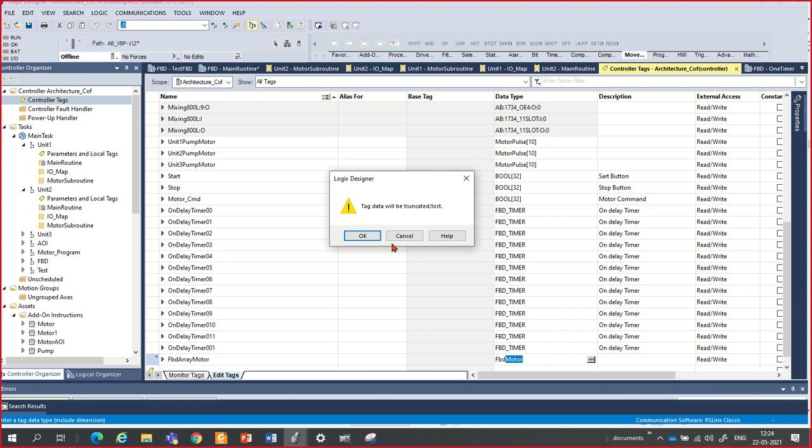Array motor. Okay, create FBD array motor tag, and here I will select FBD motor data type. Okay, and here we can try creating the array, suppose create a, okay,

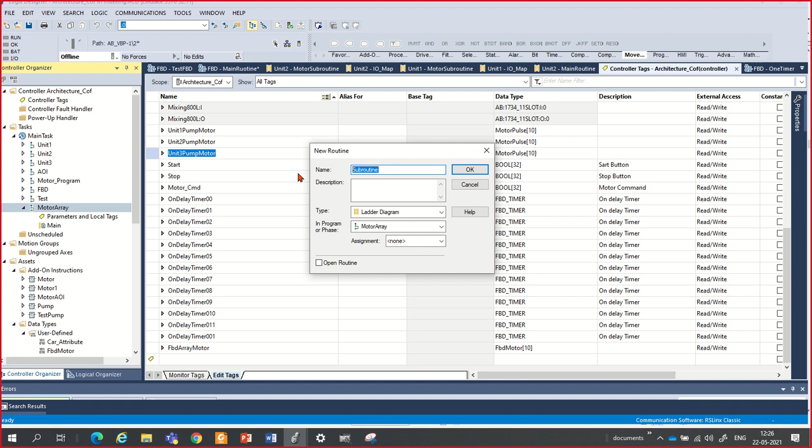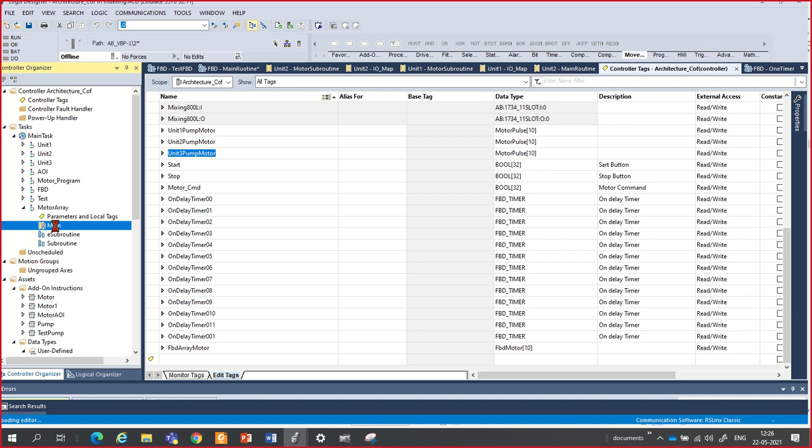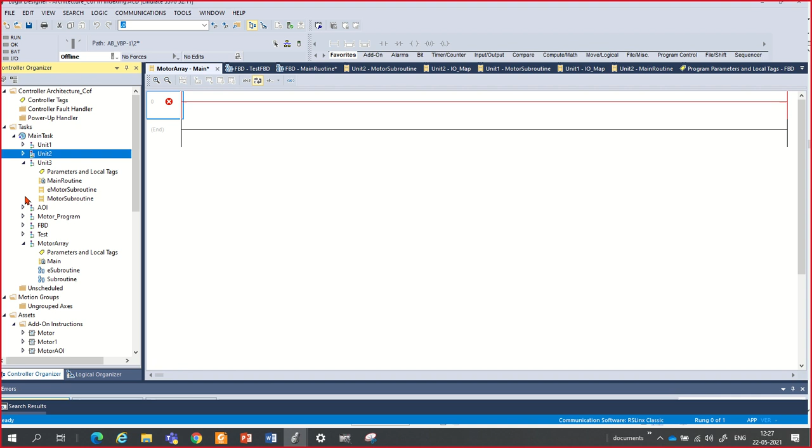Then add new routine, here we add e subroutine, like previously we done e subroutine, and create OK. There is one e subroutine and subroutine. We have two routines. From main routine, see here how we created, you can see here main routine. In the normal routine, you want to add this logic, like we can add it,

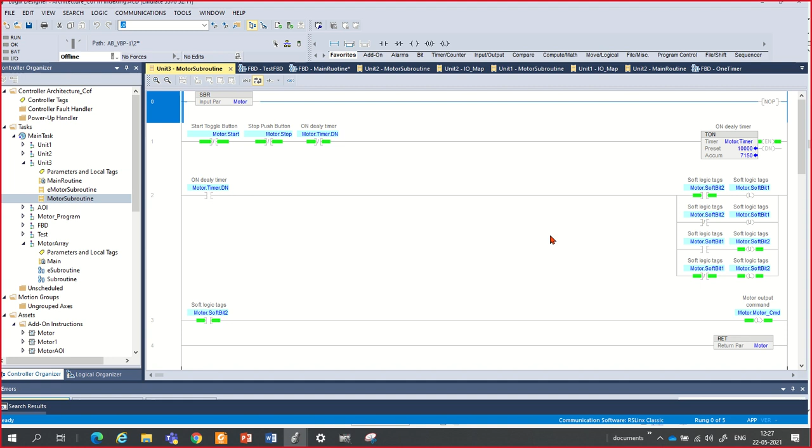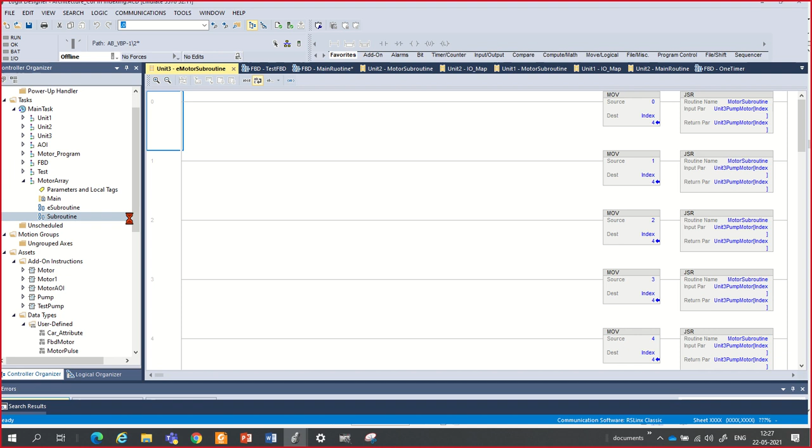and from the e-motor routine we can create this JSR instruction and pass on this JSR tags. Okay. In the subroutine, go to the subroutine, and here you need to create two different tags, which is, I think in the routine we required these tags also, which locally we have added is b0, and this tag also we required. I think we can try without this b0 tag, and like that tags we can use local tags, and then we can try to create.

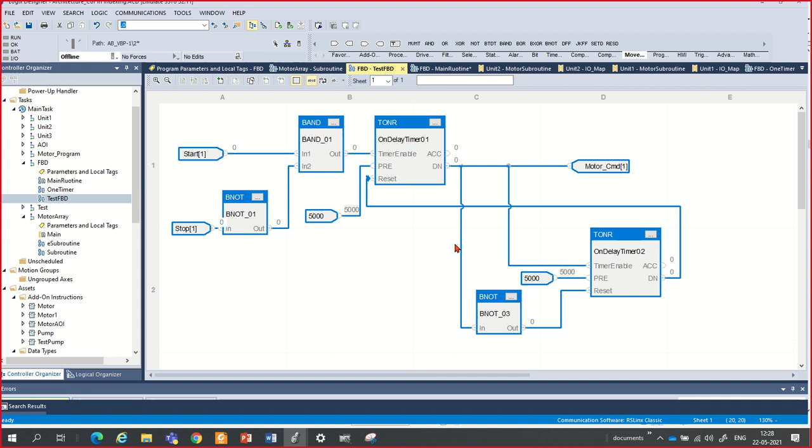I will just go to the test FBD and select it, copy it and put in your routine. Okay, then here we need to change the tag name. Here what name we want to give, the local tag here we need to create. Here I will just create the motor tag. I have created, which is motor. Then here the data type of this motor is also FBD motor, should be FBD motor.

Okay, then you can assign this start. In the start you can type motor dot start. Okay, we'll just try it directly, motor dot start, and same here. Here you can select motor stop.

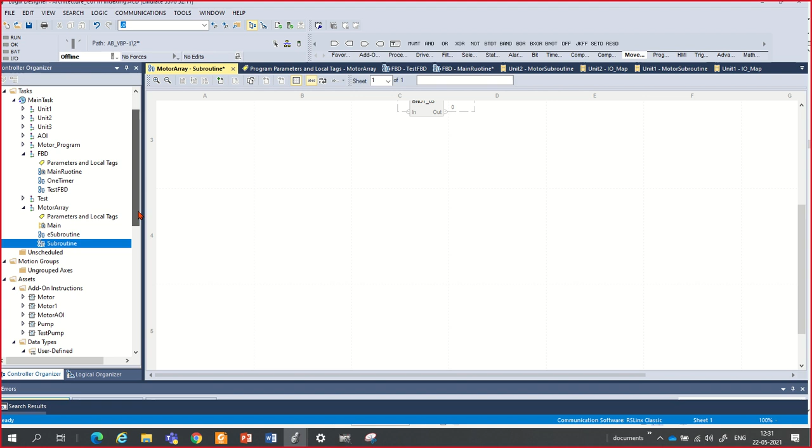And this preset is there. Okay, just change this with the motor command, or just a motor command also you can use in the UDT. And here also we need to change this timer

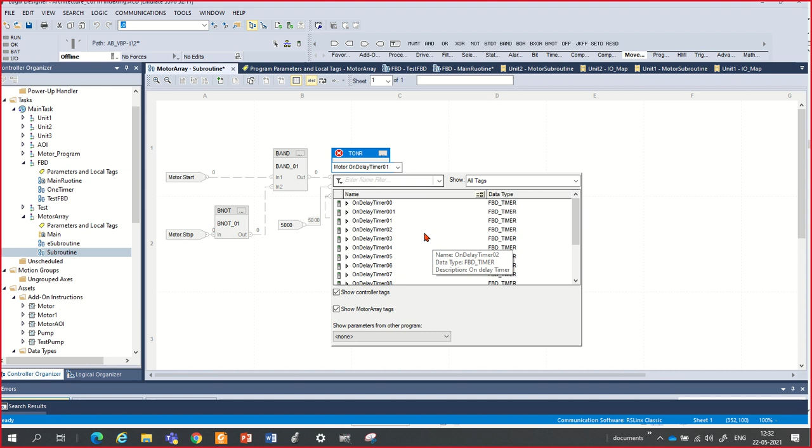with the on delay timer, which is from motor dot on delay, motor on delay timer 01. We can check it here, if the parameter is available or not. Yes, you can copy it from here also and directly you can paste it here.

But I think in the last we see in the array we're not able to paste it here. That's why in the FBD there is no possibility to create the indexing if we're not able to pass this parameter. Then indexing is not possible. Only ladder you can use for the indexing. Then our plan is

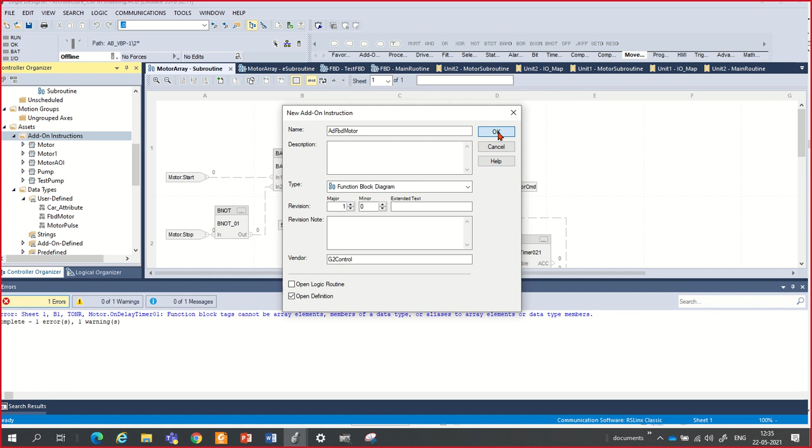Okay, now the tags we can copy from UDT and paste it here again, or otherwise we can create start, stop, motor command or command, cmd. Yeah, we can give it as out cmd, then on delay timer,

that is on delay timer 1 preset value. नहीं तो इसको ऐसा भी कर सकते हैं, x on delay, preset on delay timer 1. The next one is 2.

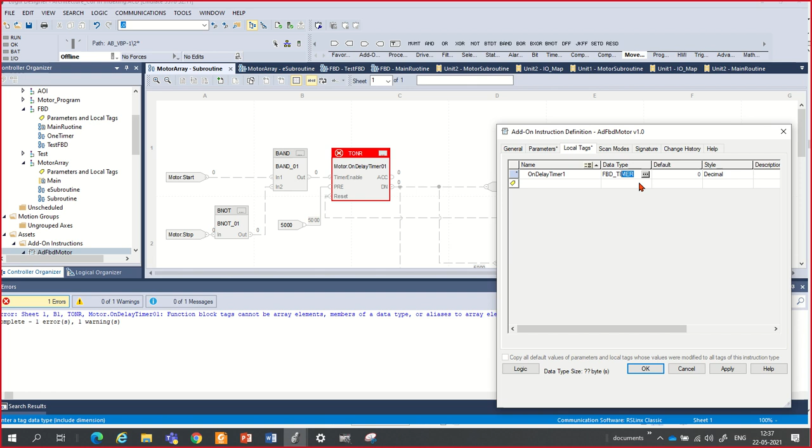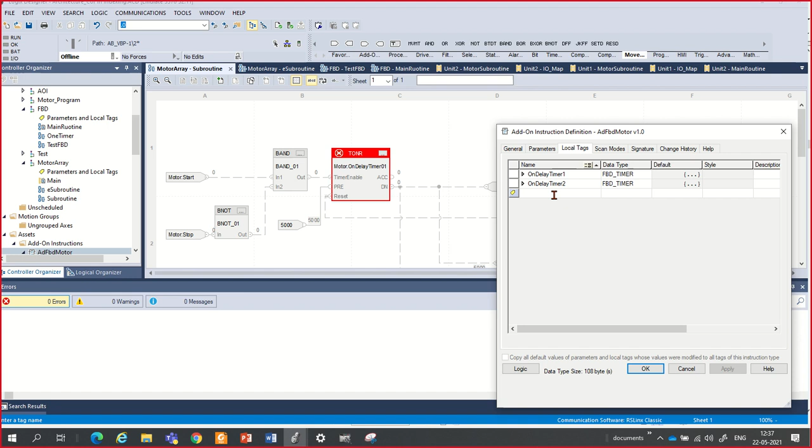Tag name should be same. Here if you see lots of errors, just remove those errors with the proper tags. Start, error gone, stop, error gone. Then BNOT, BAND this we replace with the on delay preset timer 1, and here also we replace with on delay preset timer 2.

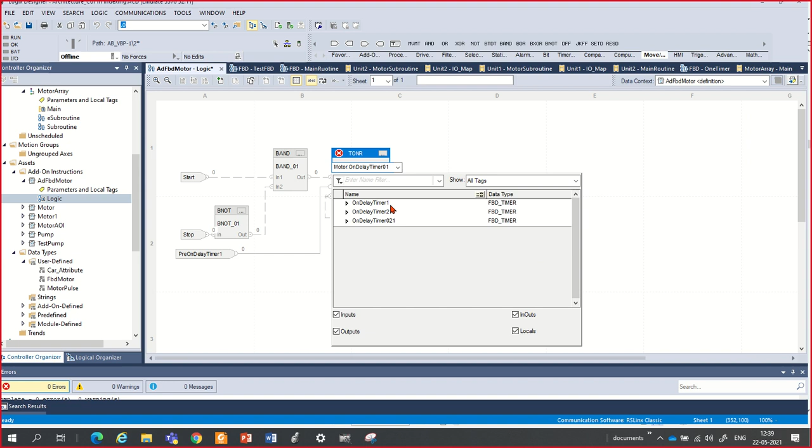Okay, and here again we see the error is there. Then you can select the timer we have created, timer 2 here, and here we can select timer 1. Okay, and here is the out command. Okay, now your logic is ready.

Now you can use this logic outside, but initially we check how many parameters we have added and which are not required and which are required. Those parameters we can remove from the block. If you want to change the name with 2, I will change it with 2.

Can you give me one minute please? Yes, I'm back.

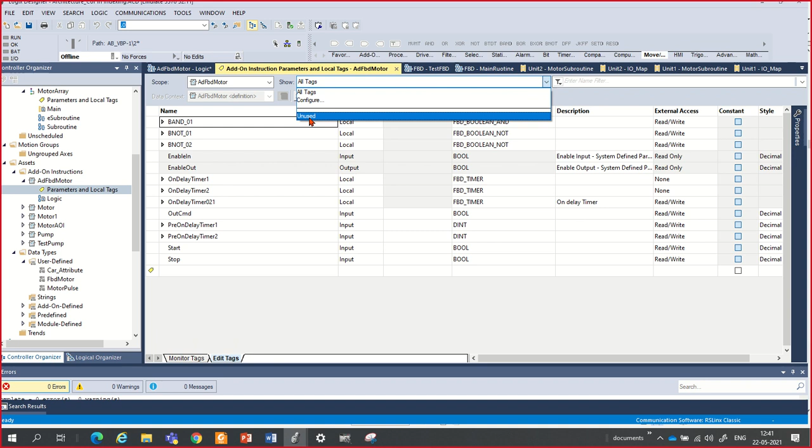Now logic is ready. See here some parameter is not used. Just click here and click on unused parameter. If you see there is one parameter not used, you can delete it. Not required, delete it. Then go to the parameters. Which parameter you take out, which parameter is visible, that we need to tick here.

Here this preset on delay timer. We need to set some delay time here. If you want to set it in milliseconds, you can set 5000 as a default value, and here also you can set 5000 as a default value.

Now the value we have set 5000 as a default value. If you want to see it visible outside, then you can click it here, but this is not a required parameter, that's why I just left it untick. And out command, I want to see outside, then click it here, out.

And this start button and stop button, if you require them from the external signal, then you can use this like that. Or if you don't want to show or require the parameter, then you can untick. But if this is actually a required parameter from the external source, which is mapping with the hardware input and output, that time you need to tick it. Right now we are using just simulation, so I will just keep it not required.

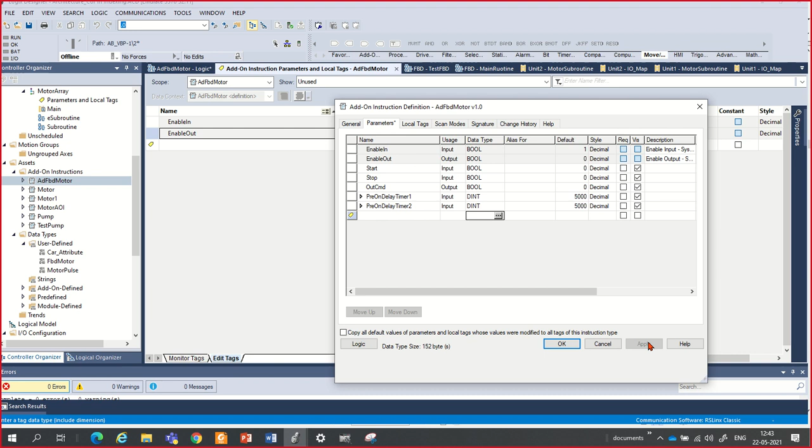Okay, then our block is ready. Then you can use this block for your logic development. How we can use it, I will show in the FBD. In the test FBD, you can go on with the same FBD block. In the same block, I will just call that add-on block I have created. Just click on this add-on block. Here you can see this add-on block is there. See the AdFbdMotor, this block is there. Okay, then you have converted this complete logic in one block.

Then if you want to pass some parameters inside this block, then you can pass the parameters. Like suppose the same parameter, I will just copy it here and paste it here, on this input side, and just connect it with the start, connect it with the stop. Okay, these two parameters I have connected, and same for the motor. I will copy and

I will just use the same parameter with this, but here only one output we can use at a time, that's why it's showing red. I will just change the tag with 2, then the error is gone. And here also I will change that tag with 2 because we are using a different one. Then here also you can change it with 2, then your logic is ready. Okay, now logic is ready. Then you can download and test it. I will just take.

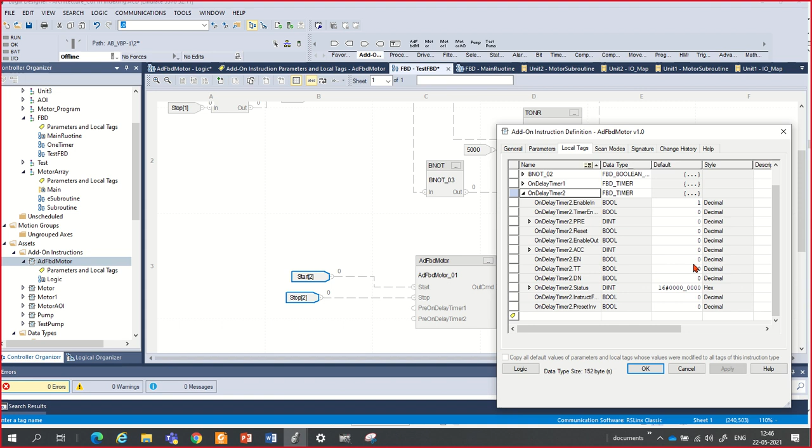Which one? Yes, we can put a default value here. No problem, we can put it. But if you follow the standard procedure, then sometimes it will reset the default value, sometimes not. There is a 0.01% chance to reset the default value inside, otherwise it will take it as it is. That's why I am taking it out. If we want to receive it from the external source, then we can assign that value from the external source, otherwise we can keep it as it is. Okay, okay, I will just keep it as it is.

And now I will just download it. And here you see this add-on block automatically creates this tag. This tag you can also create as an array tag, and that array tag we can use here. I will just go to the controller tags, and I have already created some tags for the utility. That tag we can convert with this tag name.

What tag have we created? Yes, yes. FBD. No, no, motor command on delay timer. No, this. Yeah, FbdArrayMotor. I will just change this data type with the add-on instruction, AdFbdMotor, and here you can create the array.

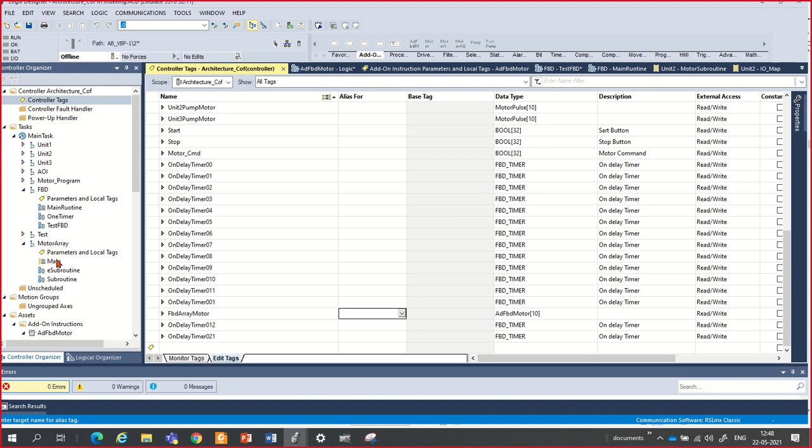Here I will create the array at 10, and you can use this array as a tag if you have multiple motors. I will go to the test FBD and select that array. This is motor, and in the bracket we put the array name and array number. If the array problem is inside the block, we can use the same one as before. Like this we can use it.

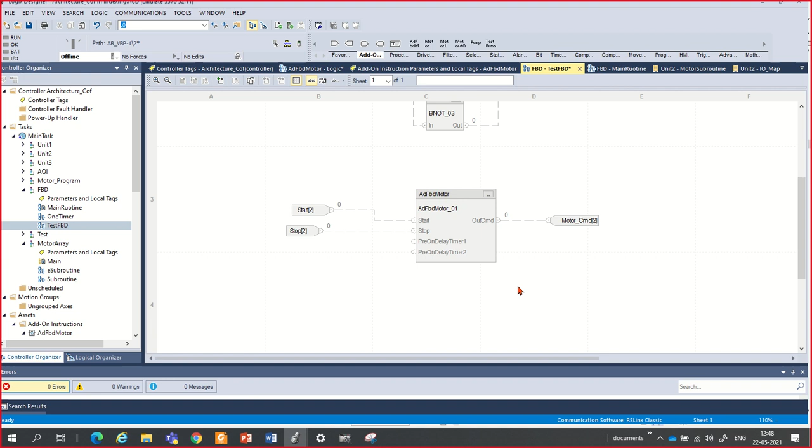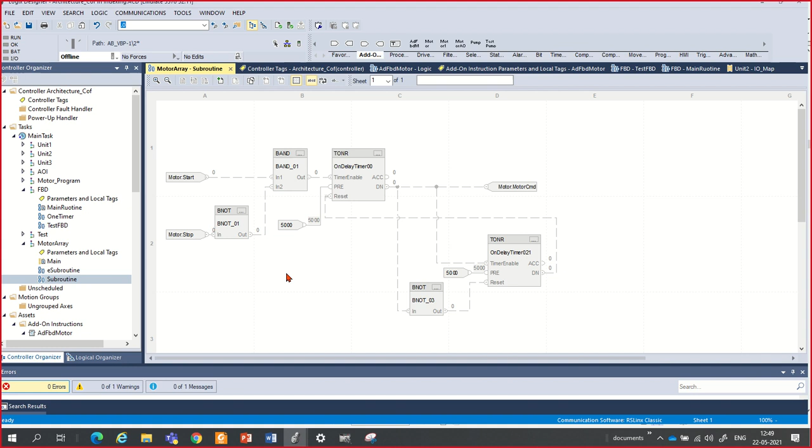Okay, then let's try to run it initially, because there may be some error. I think here we kept the old timer, I will just remove this timer. Okay, the old program. Check if there is any error in the program. I think there is no error.

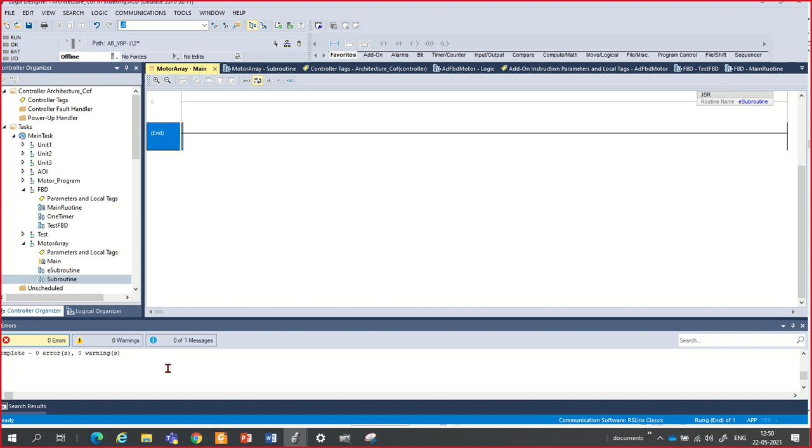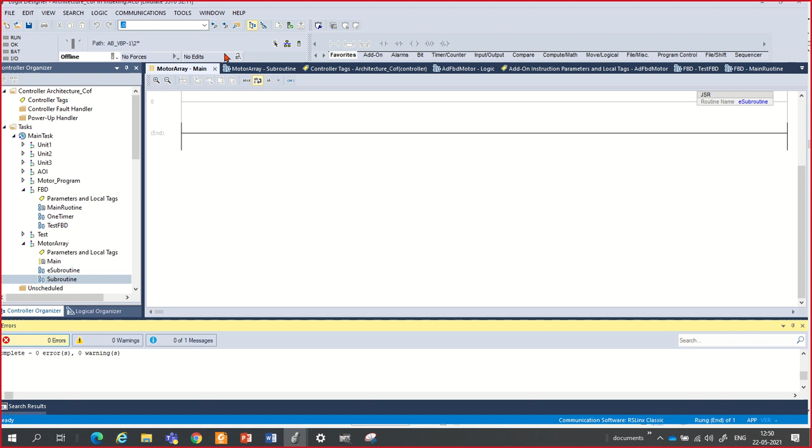Here is one error, which is empty rung. We need to delete this empty rung, or we can add a JSR and pass on this tag, otherwise you can skip it, no problem. For removing the error, you can add it, otherwise delete it. Then check if there's any error or warning. No warning, no error, then you can download. Now go to the controller, the RSLinx connection is active, click on the controller and click on download.

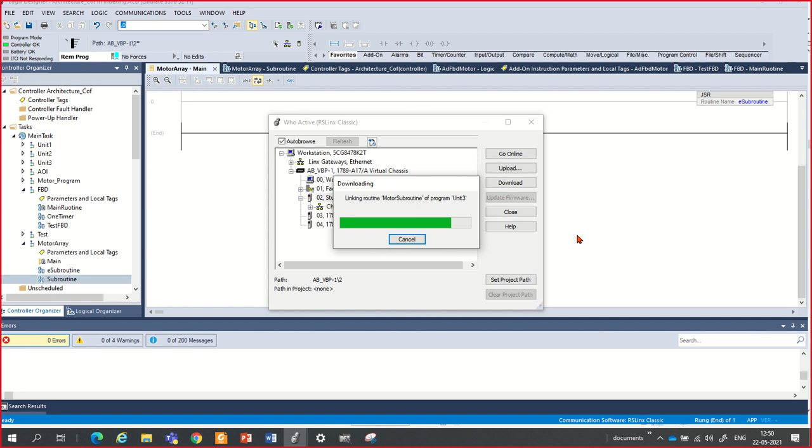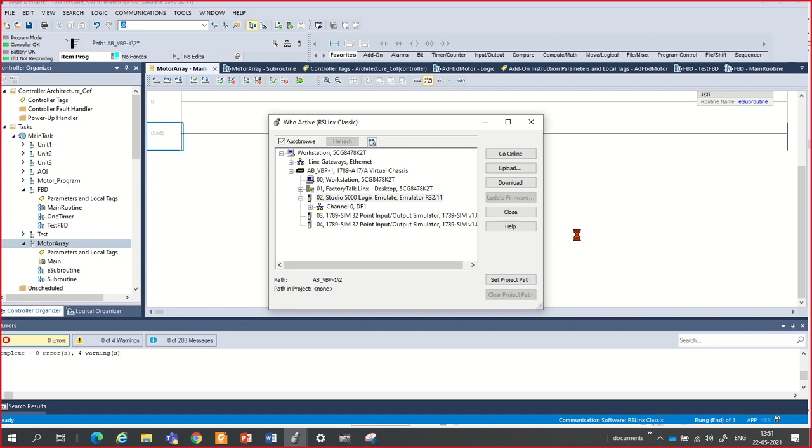Okay, go to your program, test FBD. Now put this value as 1. Now see if the timer is running or not. Just go and open the instruction logic. Yes, its timer is running. Okay, check if output is going high or not. Yes, output is high. Yes, it's working. Is it okay for all of you?

This means in various ways you can create your add-on instruction and logic. Now, do you require more information regarding FBD, or is it sufficient for learning and testing?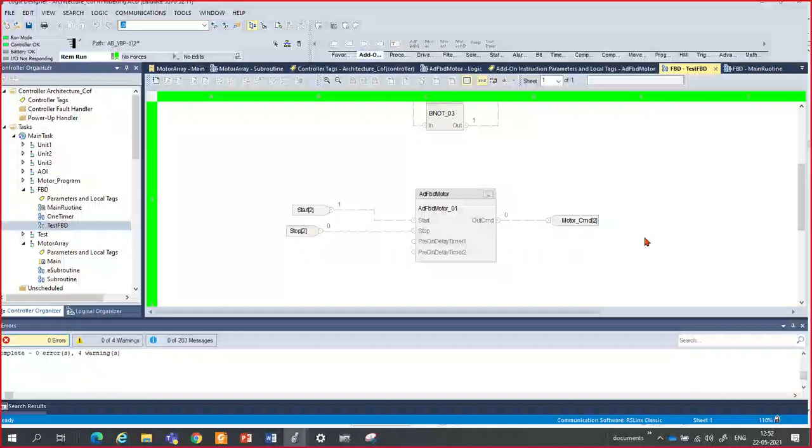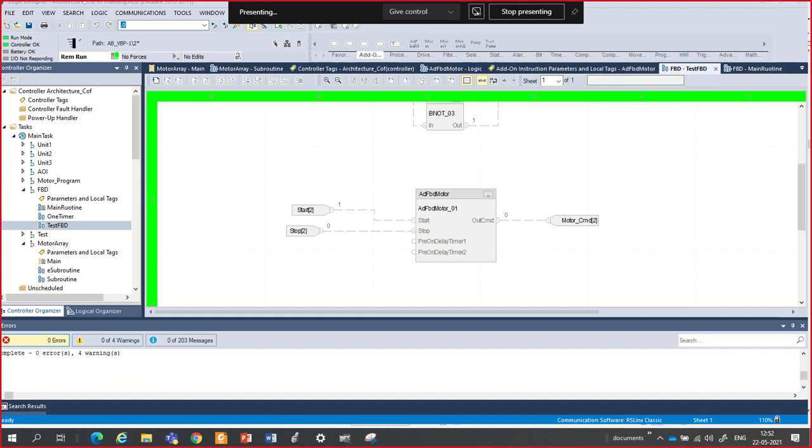Pardon? Access? Yes, yes, yes, we have some exercises. Can I pass these exercises and you can do them? Okay, at 1pm we can take a break, and before that I will pass on some exercises to you. We will check which exercise you can do first. I will show you the document. Just tell me which exercise you want to do. Pulse width, not required.